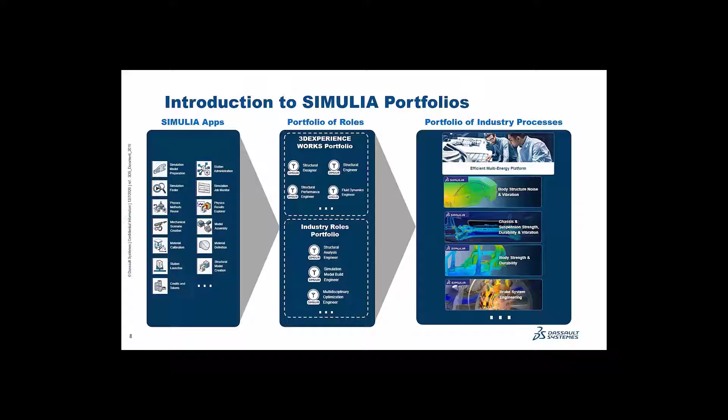For your reference, here's a summary of the simulation roles currently available in 21x. Most of these roles are new, although most of the apps within them are the same as they were in 2020x. The roles are arranged in either industry-specific roles, as seen on the right, or as cross-industry roles in a variety of domains, such as structures, fluids, electromagnetics, and so on, as seen on the left.

The intent is that for a given user, only one should be sufficient for them to do all they need to do on the platform, without the need for add-ons. I mentioned there were 7 Works roles, which are indicated above. These same 7 roles are also included in the industry portfolio as well.

Let's now take a look at the repackaging of what we know as the SPDM. One of the primary objectives we had during this repackaging project was to better articulate the values we are able to deliver to our customers. Often, when we would have engagements with customers, requests and solutions were described under the umbrella term SPDM, or Simulation Process and Data Management. While it is true that SPDM is a commonly used term in the industry, using it to describe our solutions undervalues what we can provide our customers through the platform.

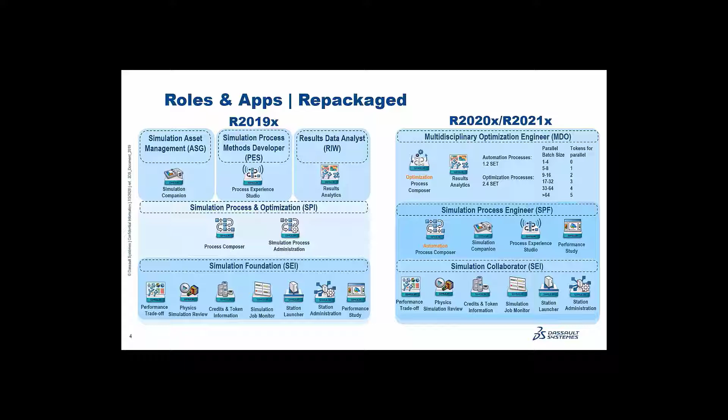This slide shows how the apps have evolved with the new packaging. Previously, we had two roles: Simulation Foundation, which provided infrastructure and apps focused on activities such as monitoring and sharing data, and the Simulation Process and Optimization role, which added capabilities to author automated or design exploration processes. Additional roles could then be added using these as prerequisites to expand the available capabilities for ad hoc processes, template creation, and data analytics. The new roles are intended to provide all of the apps needed to satisfy the categories I just described, instead of adding capabilities a la carte. For example, for users performing design exploration, they will not purchase separately the ability to post-process their results.

As part of this new packaging, there were a couple of key changes that were made. First, Process Composer is now split into two apps: Automation Process Composer, which provides the tools needed to build a process that can automate simulations and process data, and Optimization Process Composer that extends this capability to enable design exploration workflows, including methods such as DOE, Monte Carlo, or optimization. Another notable difference is that the Simulation Collaborator role is no longer an authoring role. Execution of automated or design exploration simulation processes will be performed through the SPF and MDO roles respectively.

We also simplified our business model for execution. Automation processes will now consume 1.2 tokens and optimization 2.4 tokens, with additional tokens shown in the table for parallel and batch jobs. Thank you, Christina.

Now let's run through some of the new software enhancements in R21x.

Not all the enhancements, like I mentioned before, will be presented, just some that have significant impact on certain roles and workflows. For each of these, only the roles which are significantly impacted are listed, even though other roles may include the app which has the improvement. These enhancements will be presented next in a few different arrangements of the same information for easier future reference. So many items may be repeated.

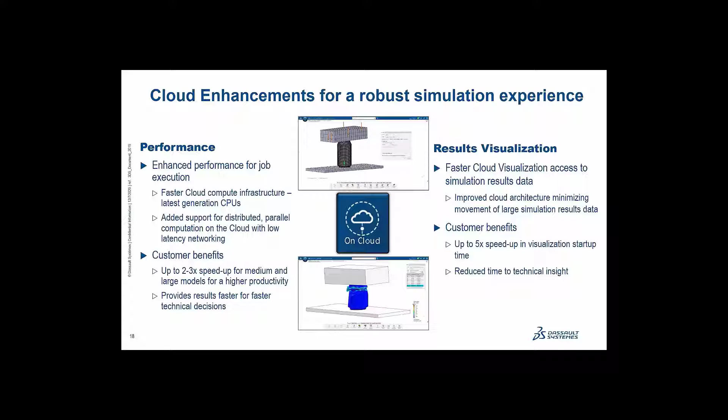Then, when visualizing large simulation results stored on the cloud, the visualization startup time, which is the time it takes to see an image after clicking on the results button, has been sped up by up to 5 times, again depending on the size of the results. This is due to an improved cloud architecture minimizing the movement of large simulation results data. In other words, any simulation cloud user out there will experience a dramatic improvement in the time it takes them to run jobs and look at results.

Okay, let's look at other app-specific enhancements. We're not going to cover every single function delivered, and we try to provide you with a good sample of what's being done. All the details can be found in the release notes and in information found on the platform, which I will be highlighting later in this presentation. You'll see that throughout the slides, we are showing you what the enhancements are, and on the right, we are again highlighting in blue which roles are seeing the biggest impact from a given set of enhancements. And at the top, whether the enhancements are delivered in GA or in a particular FD.

First, for structural model creation, the way we support Nastran data has been improved. This provides an increased incentive for 3DEXPERIENCE adoption, and we're providing users the ability to manage and use legacy and supplier data while maintaining the digital thread promised by the platform. A few examples. Additional data cards are supported. The importer now supports the inclusion of reference files, and we're giving it an option to structure the imported data.

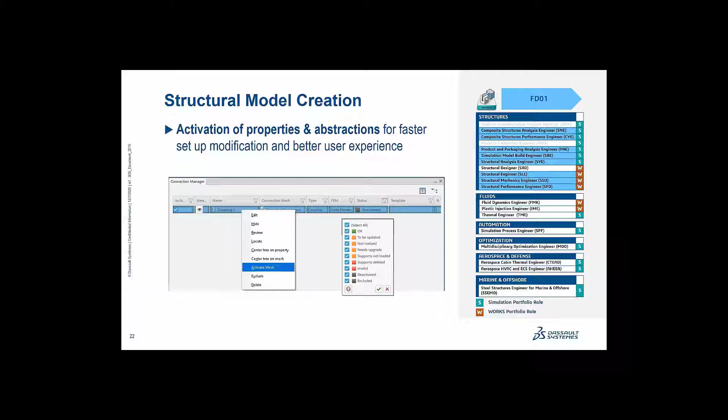Still in the same app, structural model creation, we're improving how virtual bolts are detected. So now, instead of only looking for holes when trying to detect where to create a virtual bolt, we can search for user-defined points and lines. This increased the robustness and speed at which users can define these very useful virtual bolts.

We keep improving the surface meshing in many different ways. The mesh quality and regularity are getting better and better, in part driven by the partnerships with strategic customers. And we're adding nice features like the new lined fastener T-joint construct, a new thickness mapping, and new section called shear panel. This last one is particularly important for A&D customers, aerospace and defense, and related to what is being done in legacy codes like Nastran. Overall, these enhancements provide users with the ability to increase how accurate the representation of thin geometries is, and therefore increase the accuracy of the simulation results.

In mechanical scenario, still in FD01, we're delivering the ability to use the FKM method to assess the fatigue of welds. This improves the credibility of the 3DEXPERIENCE structures apps as a fatigue solution and provides users the increased flexibility when assessing assembly's durability.

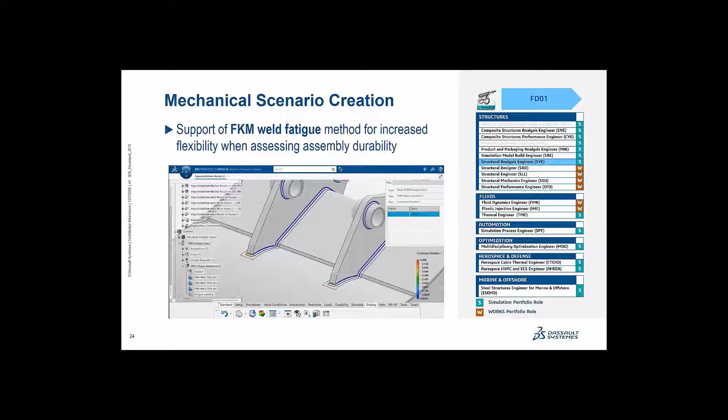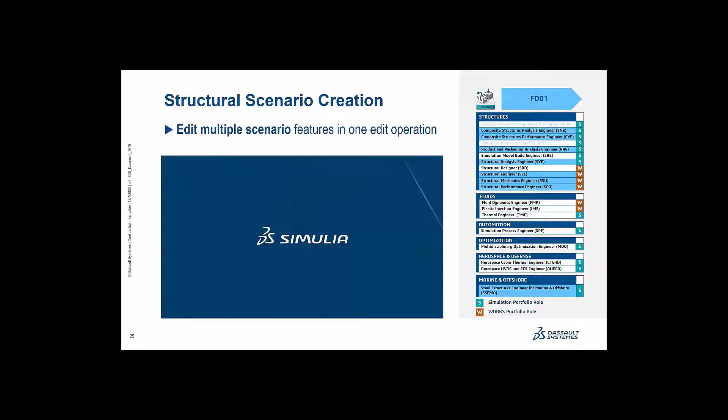Here, in structural scenario, multi-edit for scenario features allows users to make the same changes to multiple scenario features in one edit operation. Each video on this, well, you're not going to be able to see that. So to make it easier, each one of these slides has a video, but each video on these slides can be seen on a wiki page, which I'm going to give you at the end of this session.

For linear scenario, SOLIDWORKS simulation data support is included, SOLIDWORKS Connected, to streamline the engineering workflow with a unique capability. You'll be seeing more about that a little bit later. For post-processing, we provide users default global sensors automatically after solve for faster and more efficient trade-off studies.

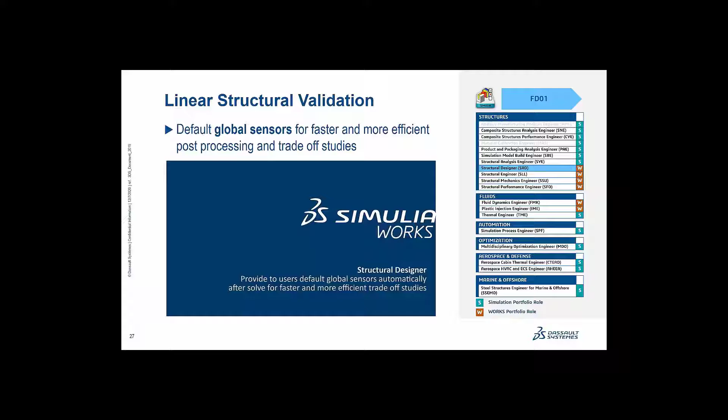For fluids, and this is our native Navier-Stokes-based solution, the main improvement is on solver performance. This is significant and important because it allows users to get to the results faster. We've improved the solver efficiency when working in parallel to be 10% faster for the segregated solver and 5% faster for the coupled solver. And the way the solver processes input and output data is faster by 30%.

For Physics Results Explorer, a couple of nice improvements. We're providing users with more ways to define cut planes, for example, by using a user-defined axis system. And we're adding the ability to define resultant sensors on a specific axis. This is actually fairly important. A sensor automatically extracts values for the quantities the user is specifically interested in.

This is particularly useful in the context of automation, if you want to reuse the value in a result as an output parameter to monitor, for example. When looking at efforts in a bolt, again, for example, it is often more useful to study what happens along the axis of symmetry of the bolt, rather than at its surface. This new capability allows users to do just that when using sensors.

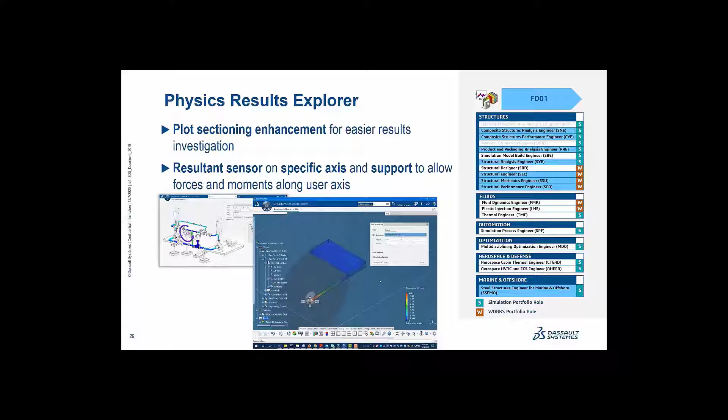So here, the new results comparison across analysis cases and simulation objects is the new capability. You can compare multiple field and XY plots from the same analysis case or different analysis cases in an intuitive, configurable comparison preview pane. Results comparison tasks become easier as you can display more than one view and more than one plot at a time.

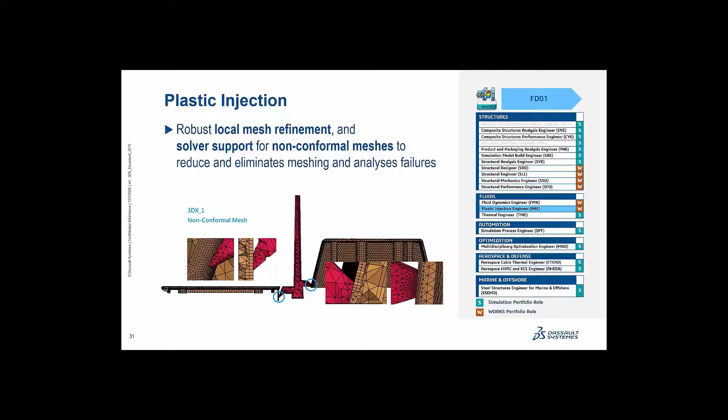The main enhancement for plastic injection is all about non-conformal meshes, which is when the nodes of two surfaces in contact are not aligned. This can sometimes become tricky for the solver to process. So in FD01, we've enhanced the robustness of the solver to deal with these types of configurations. And when it's not enough and the non-conformal meshes need to be fixed, we've added highlighting and fixing tools to help the user to do so.

Finally, for the Automation Process Composer and Optimization Process Composer apps you heard about earlier from Christina, we are improving the user experience with a redesigned interface for mapping parameters. This leads to a lot of time gained when defining optimization loops in mapping input to output parameters. And some might say increased user satisfaction when using our product.

We're also adding a so-called N2 parameter map, which is very helpful when it comes to understanding the data flow in an automation and optimization loop, by looking at the path and numbers of the parameters as they input and output the different adapters in the loop.

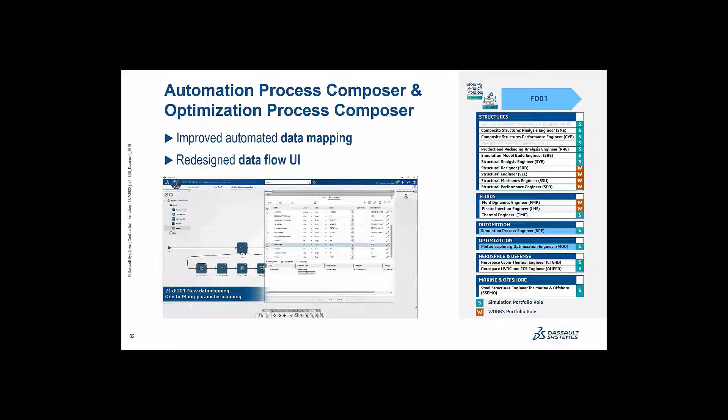So I'll not go through the details again, but the same information that I just showed on a per app basis is shown in this section on a per domain basis. I'll just flash the different sections by so you can see what I mean. So here you see the structures enhancements involving improved user experience and all the roles that are significantly impacted by that.

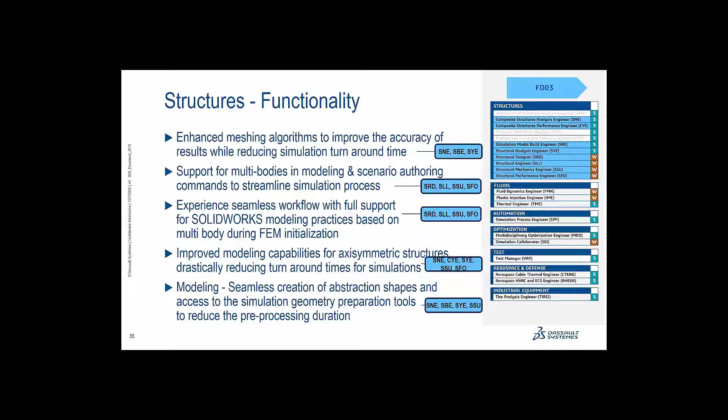The improved functionality for structures, same thing. Again, just reorganized, same information that I already covered. And the fluids enhancements as well. Just so if you want to refer to it in the future on a per app basis versus a per role basis, for your convenience. And here are the optimization and automation ones.

Now let's switch gears and give you an overview of the R21x FD01 portfolio for the Works portfolio. Again, a lot of the same information. I'll talk a little bit about general things associated with the Works portfolio, but then the rest of the enhancements will be summarized in the same fashion. The Works simulation portfolio is part of the 3DEXPERIENCE Works portfolio targeting the mainstream community with design, simulation, manufacturing, governance, and marketing and sales domains.

In 2020, the Works simulation portfolio is targeted at top simulation domains, including structures, computational fluid dynamics, plastic injection, and collaborative decision-making, so users get the right technical insights in all required domains at the right time. Works users are able to assess performance, reliability, and safety of their products for a faster and stronger manufacturing and go-to-market phase. With this new portfolio, tailored for the need of the engineering community, users experience unique engineering collaboration on a single and shared cloud environment.

They gain a full integration of design and simulation to increase innovation and eliminate silos. With this cloud portfolio, hardware barriers are removed to provide virtual testing benefits to all users through unique cloud computing. The value delivery plan for simulation has been structured along the following 5 drivers. 1, improve structural performance and quality.

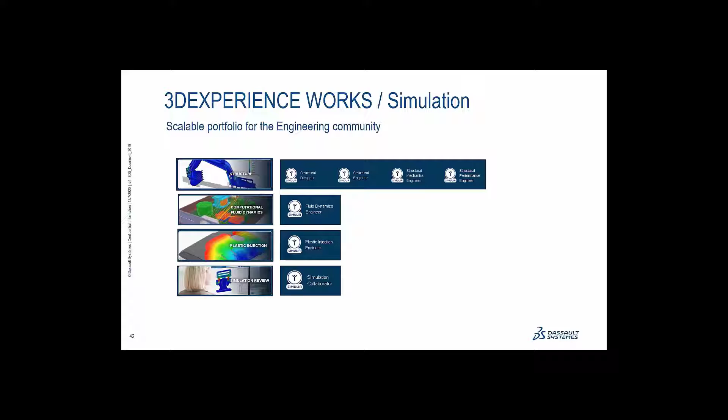To make informed decisions, users are empowered in performing trade-offs between competitive objectives and constraints, so the comparison is meaningful and leads to the right alternative selection. Within a 3D dashboard, users can easily visualize simulation data for interactive and collaborative reviews, changing the design process into a collaborative experience.

The 3DEXPERIENCE WORKS portfolio has been enhanced through these roles to meet users' day-to-day needs and bring a unique design simulation to all design engineers. We've already covered the enhancements to these roles in the earlier section, but I'm going to show them here again in a structured way for future reference. So you see here they're arranged more toward the SOLIDWORKS user. So I'm just going to blast through these because again we went through much of this material in the previous section.

Now, on to the illustrated examples. Asif and Ryan will show you how these improvements affect industry workflows.

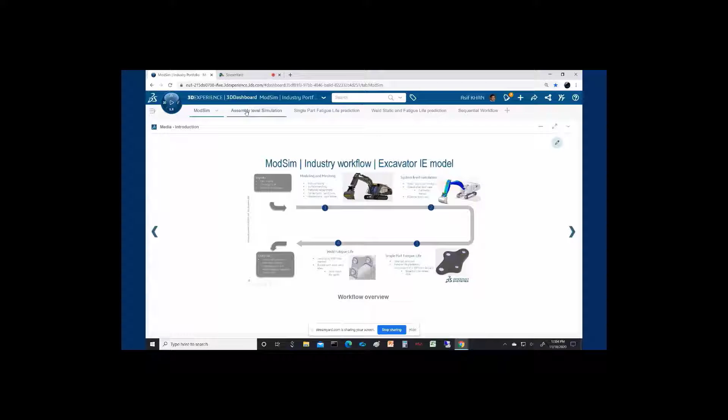So let's switch over to the assembly level simulation tab. And here you can see that in my dashboard, I have a spiral on the left representing the various pre-processing steps that will be carried out to build the model, basically do the meshing and the section assignment, and then get into more details with connections.

So first, let's have a look at the assembly that we will be working with. So I'm going to show you the model in this 3D Play web application. The analyst can quickly review, manipulate the model, and then we can look at the assembly structure. For example, here you can see the top level assemblies. And for this presentation, we're more interested in the front attachments for the boom and the arm.

So we can go in and we can review the various components and decide which ones to do the simulation on. But it's actually more interesting to get a high-level overview using some of the tools. For example, in the application, we have an explode option. So when I click on it, it explodes the model to show the first level, top level subassemblies, and I can go in and dig deeper inside to look at subsequent levels of subassemblies. And here you can see all of the subassemblies have been exploded for view and understanding.

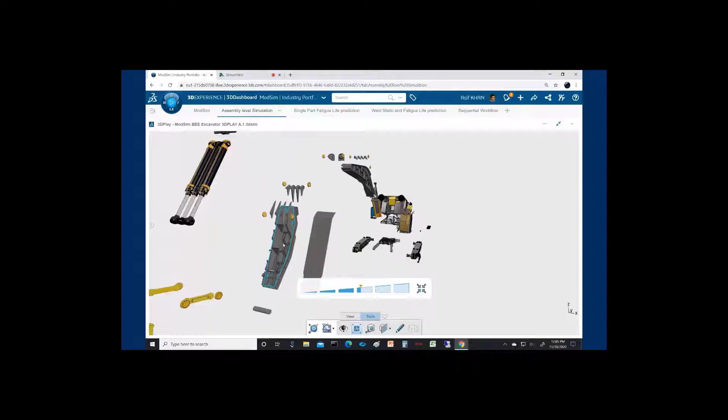As I mentioned, in this simulation, we're going to focus on the boom, and I can move these parts to understand the structure. So we have these thin solids, and also we have some of these reinforcements, which are actually made of solid elements. In addition, I can do some measurements if I wanted to, and also, for example, collapse the assembly and maybe enable a view cut to inspect the interior of the model at different locations.

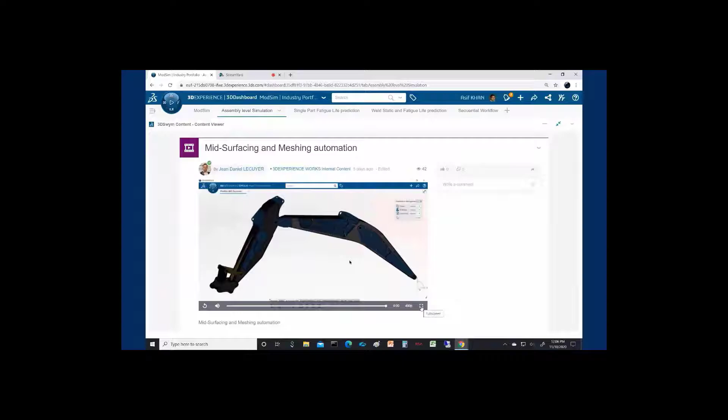So once I'm satisfied with the version of the CAD model, I can go ahead and begin with my finite element simulation definition. So the first step will be to define the mid-surfacing definition and the mesh. And in this case, we're going to use the automatic tools available on the platform as they have been developed in the last few releases, providing a lot of efficiency to the user.

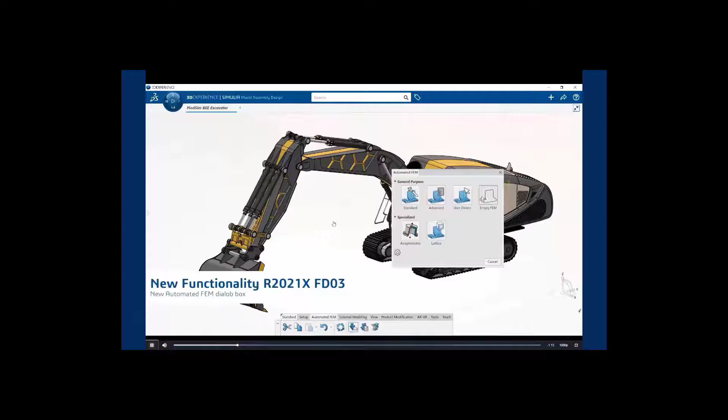So we're going to look at the assembly, and right now we're in the model and assembly design workbench. So we can switch over to the automated FEM section and then begin with the process for defining the mid-surfacing and the mesh. So with this new capability, we have this advanced option for automatically generating the mid-surface mesh.

And here we have a bunch of procedures. We can specify some parameters, choose the parts, the mesh size, and the user can also define additional procedures to be used based on various conditions. So some of the parts will be mid-surfaced and meshed, while the remaining few will be meshed with solid elements. And in addition, we can automatically create shell sections and material sections. So here we can see that 30 parts will be meshed and mid-surfaced. And when we hit run, you can see a report where we can now look at the results.

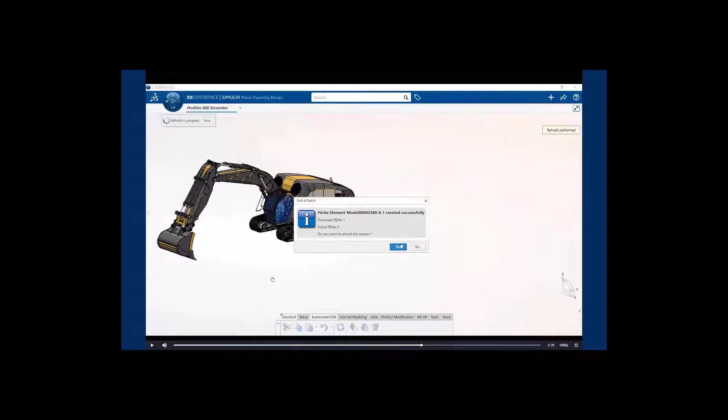Now, obviously, if there was a problem with the mid-surfacing or the mesh, the user can go in and modify some of those parameters using this interface. So we can do a quick review, and using the visualization management tools, we can have a closer inspection of the mesh. So the blue mesh is the shell mesh that has been generated, and then the others are the tet mesh shown in the other colors. So the mesh looks good, and we don't need to revise anything. We were successful in the meshing operation, so now we can go back and proceed with the next modeling operation.

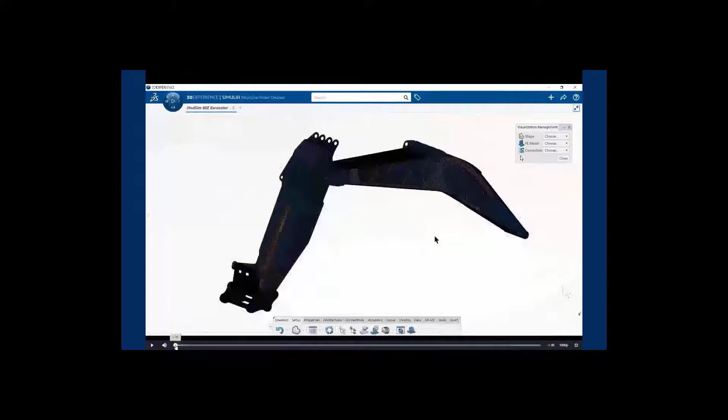So to model the welds in the assembly, we're going to use the line fastener and detection tool. So let's look at that. So as before, we're looking at the meshed boom assembly, and we can go ahead and start with defining the line fasteners to represent the welds. Now, again, we can look at the parts from the geometry or the mesh. And now we're in the structural model creation app, where we're going to use the line fastener tool to use the weld curves that were defined in the CAD system for the weld creation.

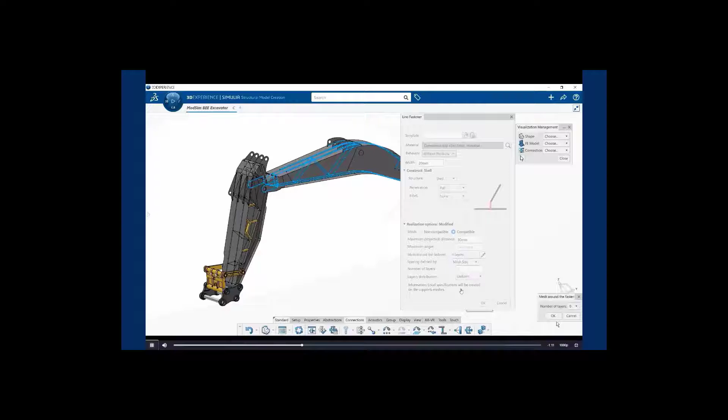So we can select the weld lines shown in blue that we want to use. And you can see that we have 52 entities selected. Then we can use the search tolerance to search for adjacent parts that will be connected by these welds. And as you can see, we have a lot of other parameters that can be specified for the weld definition. In many cases, we can use the defaults, or we can go ahead and hit the search button. So once the search is completed, you can see different welds that have been created.

We can highlight, and the associated faces that are connected are also highlighted to facilitate in the review. Next, we can zoom in, and we can see in light gray the new connection meshes that have been generated for the welds with the compatible meshes. And we can visually inspect the different regions to make sure it's correct and complete.

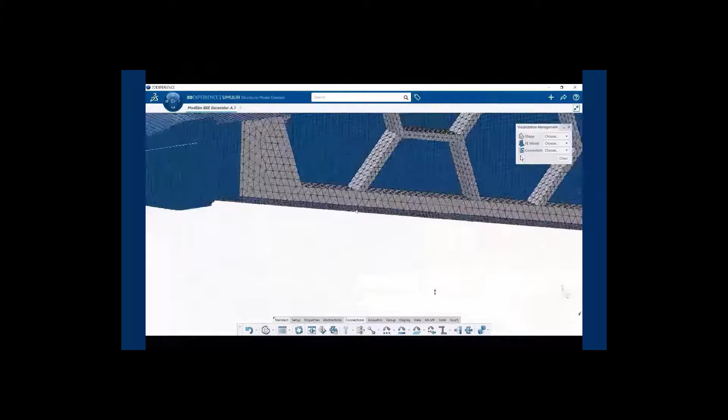And obviously, we can hide certain parts to see the interior, as we can see these stiffening plates. In addition, it's also a good idea to check for interferences in regions that are not connected. So you can see that most of the weld line regions are shown with blue elements showing connectivity, but these red highlighted elements represent intersections between solids and shells, or solid to solid. And we can obviously define tie constraints manually to connect the remainder of the parts.

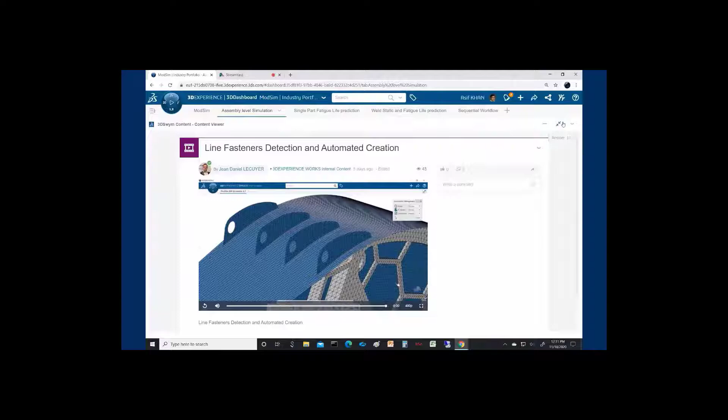So once the automatic weld creation has been created, as I mentioned, we need to define additional connector elements for the actuators, maybe create some couplings and other types of connections. And that, again, can also be facilitated through the use of connection templates and automatic instantiation. And a lot of these can be based on best practices that have been defined by methods developers in your organization. In the interest of time, I'm not going to show the remaining steps of this modeling sequence,

but I'll also mention that once the connections have been completed, we provide a comprehensive connections review capability with some recent enhancements, for example, to look at all of the connections that are associated with a particular part, or all of the parts that are connected to a particular type of tie constraint. So this helps in quickly reviewing the connections in a tabular format with 3D highlighting.

And then finally, some of you may know we have had material calibration capability on the platform for looking at realistic material calibration and parameter definition. We've made several enhancements in this release. For example, we now have the ability to look at rubber test data, which may be frequency-based, and we can do a curve fit on that with the material calibration app to come up with appropriate parameters for realistic simulation.

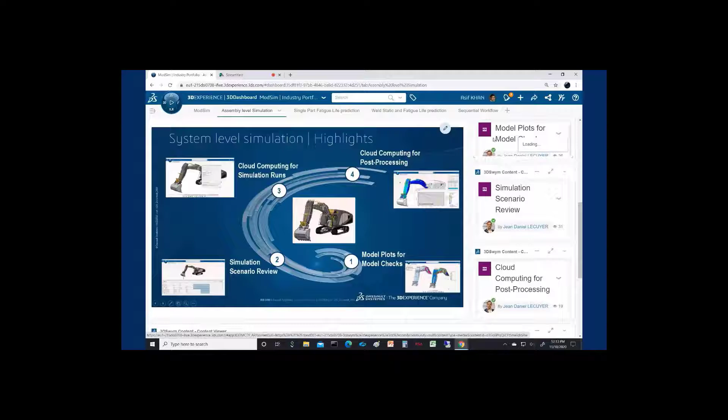So next, we're going to move to system level simulation definition. So again, in the spiral, you can see the various steps that are needed to define the simulation. So let's first have a look at the model plot definition. So here we're going to review the model that may have been created by a different user or maybe in an earlier session. So we are in the model plots workbench, and this allows you to quickly review the definitions in the model without having to run the simulation.

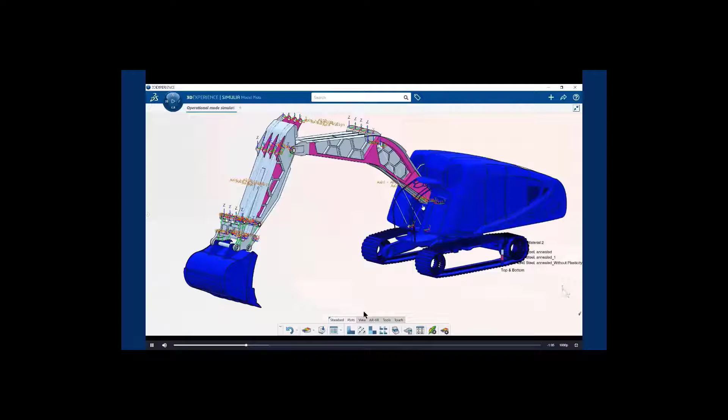So right now we're looking at the connections, and then we can color code by material, for example, to look at the material assignment to make sure it's complete and correct. And then we can also look at other parameters such as the thickness of each of the shell sections.

One interesting recent enhancement is the ability to look at multiple plots at the same time. So we can activate multiple plots. They can be in the spread mode. We can specify the spread distance. And again, we can simultaneously review the shell thickness and the material assignment for verification. So you can see the legend showing the details for the materials and the shell thickness.

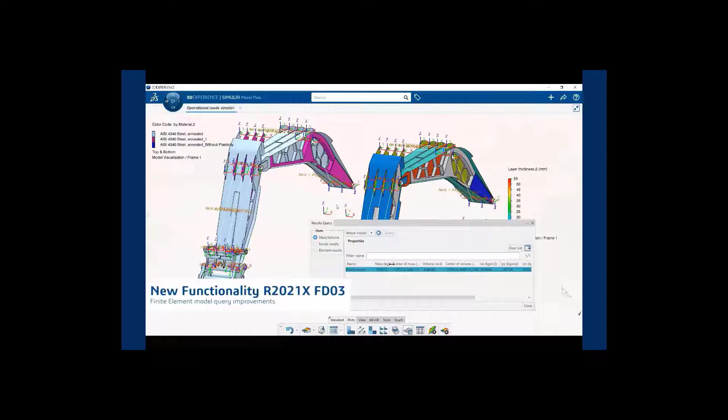Another recent enhancement is the ability to query the mass of the entire structure. So you can see in the table, we have not only the mass, but the center of volume and moments of inertia. And you can also pick or filter based on specific parts and look at the mass contribution from specific components. And obviously, we have some convenience tools where you can export this information, and it is also persisted with the simulation. So we're good with the modeling definition.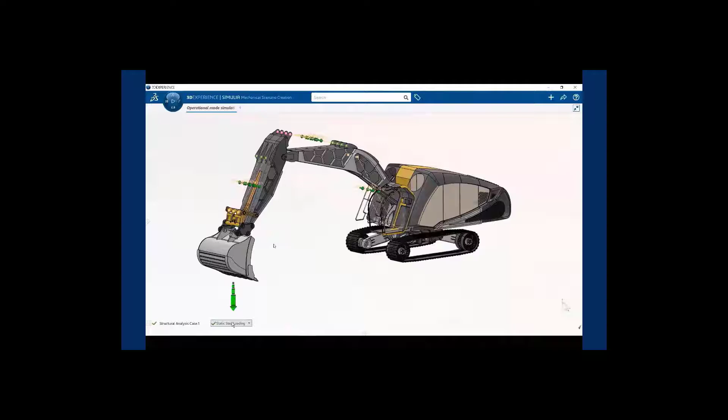So we can go ahead and do the scenario definition, which is essentially loads and boundary conditions. So we have already created the steps and the loads and boundary conditions, but I'm showing the feature manager, which will be used to review this two-step simulation. So we're assuming a service load where this excavator is doing some kind of digging with a hard soil, and we're going to review the connector forces.

And using this new functionality, we can selectively hide or show specific scenario features such as loads and restraints to get a clear picture of what's active and how it's being defined for verification. So you can see the two steps and the service loads that are active in the loading step.

So you can see the connector forces. Another nice enhancement that we have delivered in the recent release is to multi-edit scenario features such as connector forces or bolt forces. So you can select multiple rows from the table and be able to specify a new value. And this handles different values which can be updated with the new value.

So once we are satisfied with the simulation definition, we can go ahead and execute it. So in the last couple of releases, we've spent a lot of effort to enable high performance compute infrastructure on the cloud. So you can run your simulations very efficiently using the appropriate resources on the cloud for native and imported simulations. And we use that to run the simulation.

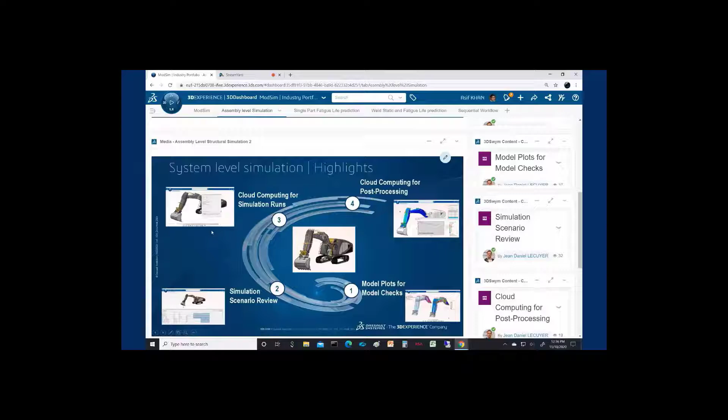In the latest release, we've extended the cloud compute capabilities to also include post-processing. So the big advantage here is that we can do post-processing without having to download the bulk data to your local machine, so saving bandwidth and giving high performance.

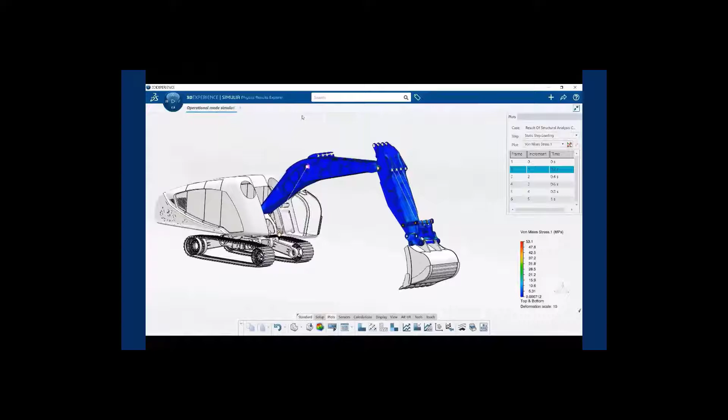A recent enhancement that I'd like to highlight is the automatic creation of sensors during the solve. So this is available both for designer and expert simulation. And you can see some key quantities such as maximum displacement, principal stress, von Mises stress, and mass have automatically been created and available for review. So this helps, for example, if you're doing a design iteration and you want to look at the change in the value, or maybe a DOE, or in an optimization study.

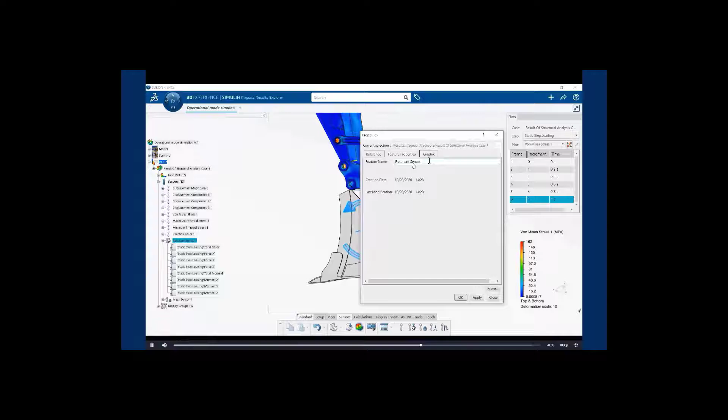We've also enhanced the ability to create resultant sensors. You have automatically created sensors to look at force and moment. But in addition, you can also manually create resultant force and moment on a view cut. So here we have activated a view cut, and we can drag it, and we can enable the display of the force and moment on that section.

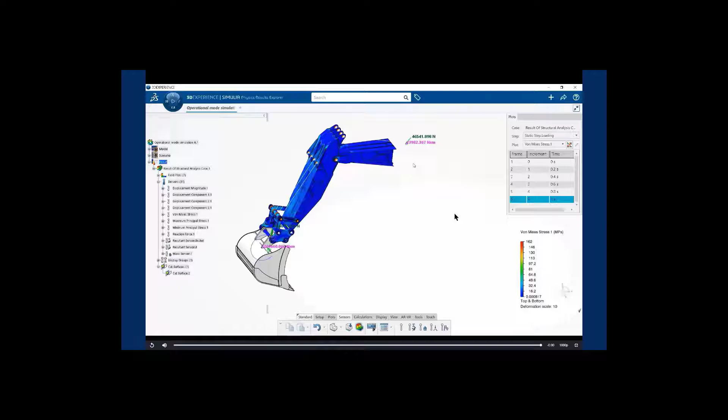The new enhancement is you can now also define force and moment output on a cut surface. So here we can choose the cut surface, that's the current active view cut, and we can look at the force and moment resultant on the view cut. So all of this information is persisted. So if you were to rerun the simulation, these values would be updated based on the new results, and they would be available for review very readily. And obviously, you can define multiple cut sections as well.

So in addition, we can run additional analysis cases or simulation types. For example, we can do an ultimate load simulation. For example, here I have a tip limit simulation where we're looking at an extreme case where the bucket may be constrained and the back of the assembly is uplifting, and we can see the more extreme results in this case as well. So you can have multiple analysis cases defined in your simulation.

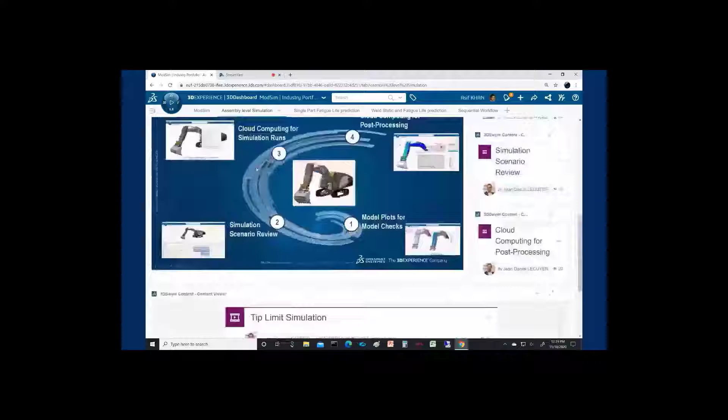Okay, so that's all for the structural simulations. Next, I'm going to switch over to the next tab of my dashboard, and this is for durability assessment of a single part. And once again, I am showing the different steps in the spiral on the slide on the left, and we can go ahead and look at some of these details.

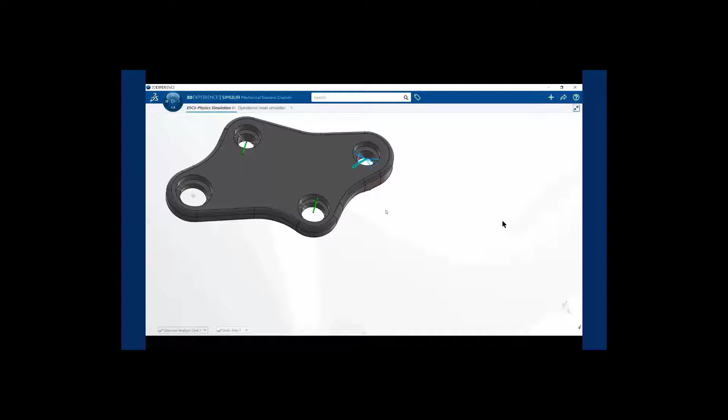So the first step for the user is to review the results of the FEA simulation. So here we have this connecting bracket with particularly high von Mises stress, and we want to do a study of the durability performance. So you can see the loads that were defined in the finite element analysis. We have three forces representing the service loads, and we're going to use this simulation for defining the durability analysis. So you can see a couple of hotspots that are present in the model.

Okay, so now let's look at the steps to define the durability simulation in step number 2. And here we can look at the part in more detail. So we have in the same simulation a new analysis case with the forces, and we can go ahead and create a new durability case. So we can go to the durability section and define the fatigue loading parameters. Here, as I mentioned, this is the nonlinear simulation, so we can select the steps and the frames to use.

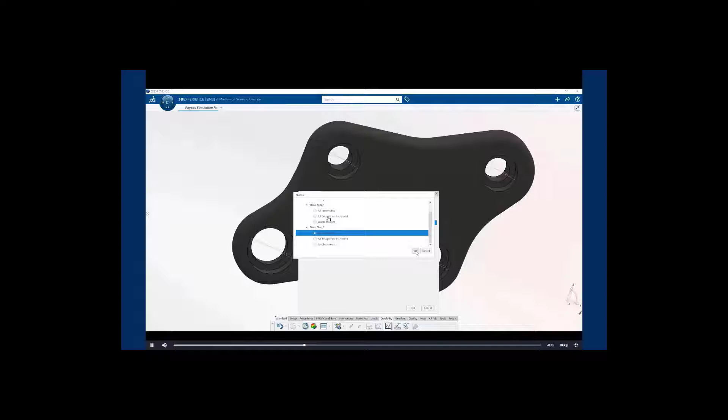We can add frames, so we're going to select all frames from the 2 steps, and then we can define the number of cycles without any failure. And then we can also modify or specify the surface finishing, which is critical as fatigue cracks typically begin from the surface. So using the same interface as previous, we can go ahead and run the durability simulation. So you can see that the exact same UI approach is used for the structural and fatigue simulation.

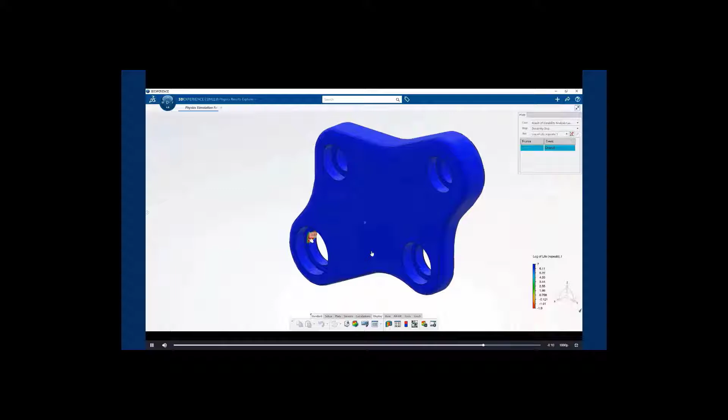So the simulation has completed, and we can go ahead and look at the results. So when we zoom into this region, we can see 2 hotspots with unsafe design with log of life less than 0. So obviously, we have to address this situation with a design change. Typical design change is maybe modifying the geometry, maybe removing a fillet or modifying a chamfer. So that's using standard CAD tools. So I'm going to skip that in the interest of time.

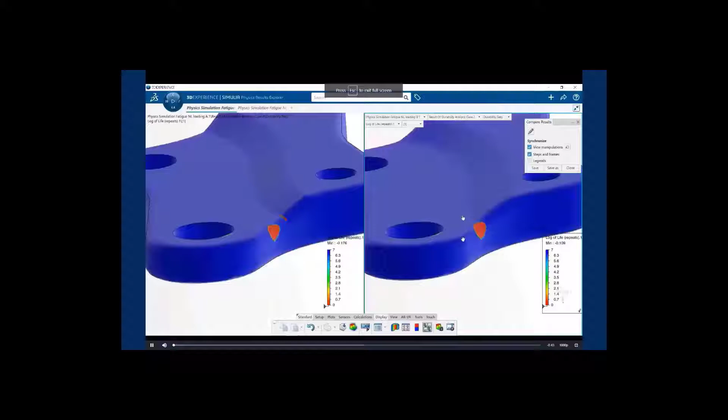So we're going to jump right ahead to step number 4, which is the results comparison with the modified design that has been run with the platform. So let's look at the results comparison. So on the right, you can see the modified design, and one of the hotspots has been eliminated with the modification. And the user can obviously go ahead and make further modifications.

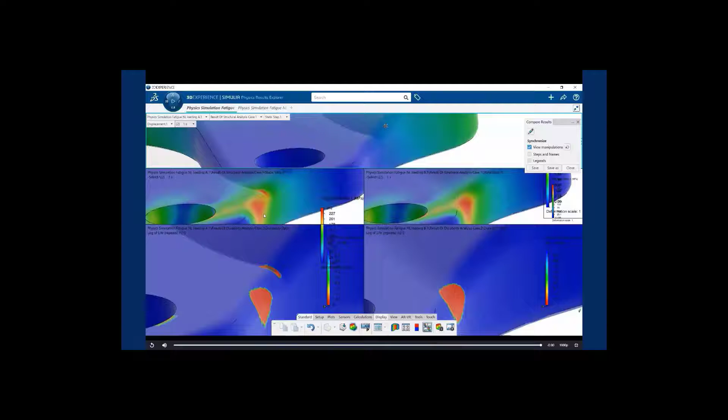Now, this comparison tool is also new. It's pretty convenient and easy to use. It's available for standard and durability simulations, so structural and fatigue. And you can drag and drop results or plots from different frames, and then you can have a comparison with multiple windows with a lot of synchronization for view manipulation, as shown here, but also for steps and frames and legend. In addition, you can save your comparisons, and also you can compare XY plots with field plots and run animations with synchronization. So that concludes this section where we were looking at durability of a single part.

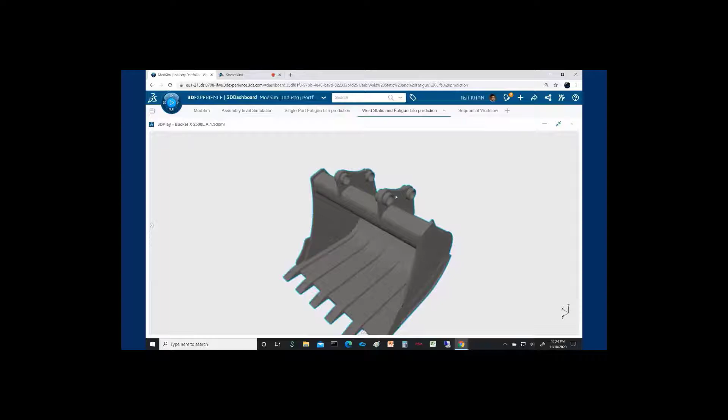My final set of slides is on weld strength and durability analysis with the FKM method. And again, here we can look at the bucket subassembly that we're going to be analyzing. So we're going to look at the weld strength between the bucket and this bracket, and also between these cylindrical attachments with the mount. So we can go ahead and look at the steps. So typically, when you are dealing with complex CAD simulations, you don't want to disturb the CAD model that has been given to you, because you have a PLM system and the CAD data is master.

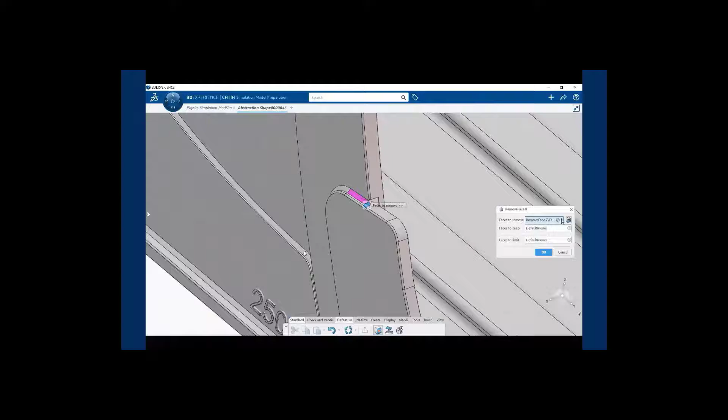So we have this new capability where you can create an abstraction shape with geometry simplification that will contain your simplified geometry for finite element simulation. So we can open the bucket part in a new window, and then we can remove or modify some of these fillets or other fine features that are not needed for the fatigue simulation. So here we're using the tools to simplify some of the detailed geometry. So as I mentioned, we have strong links between the abstracted geometry for simulation and the parent. So if the design was updated, those changes would automatically be reflected in this abstracted geometry.

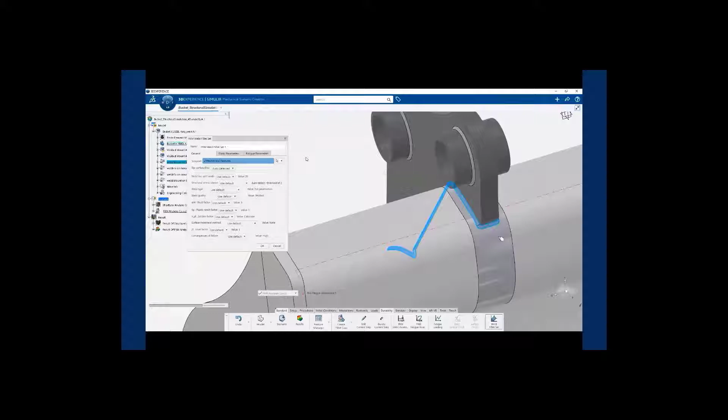So once we're done with the changes, we can go ahead and define our weld simulation. So here we're using the same subassembly, and we are in the FKM analysis case section, and we can go ahead and define the various parameters for FKM-based fatigue assessment for the welds. We can also specify some additional parameters for the welds. In many cases, you can use the defaults, or you can specify some specific handling based on your use case. So we selected the welds that we want to analyze, and we can review the fatigue parameters. So once everything looks good, we can go ahead and define the loading.

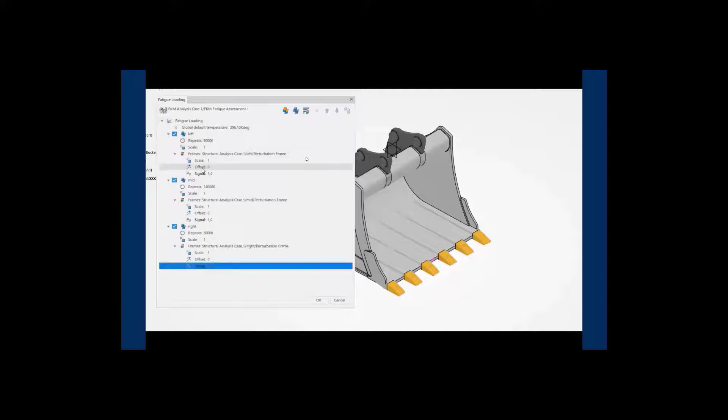So in this case, we're using linear perturbation steps. We have 3 service loads shown here, and we can combine them and define the number of cycles with superposition, and also a scale factor to combine the signals. So we're going to do that for the 3 loading cases. And then once that's completed, we can go ahead and run the FKM simulation. I will mention that we're also working on other methods. For example, some of you may be interested or familiar with Verity. That's something that will be made available in coming releases. So once the fatigue simulation with FKM has been completed, we can go ahead and look at the results.

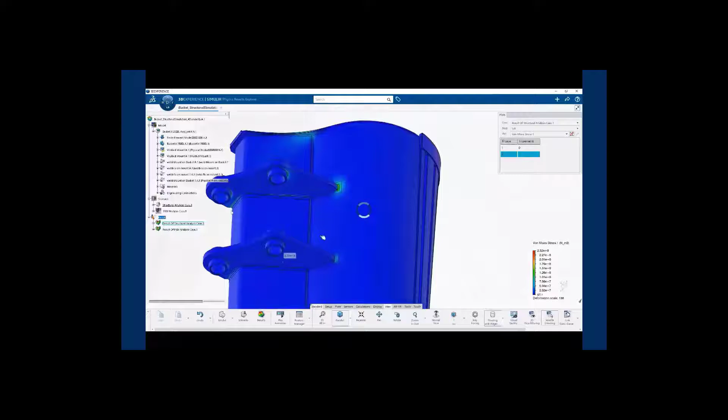So we have first the static simulation results. We're looking at Mises stress, and you can see the higher stresses in the welds that we are evaluating. We can switch between the steps representing the different load cases.

And then we can look at the utilization for the individual weld bodies that have been analyzed with FKM. And in this case, you can see that for all of the load cases, the utilization factor is less than 1, meaning that the welds are safe for the number of cycles for this simulation usage.

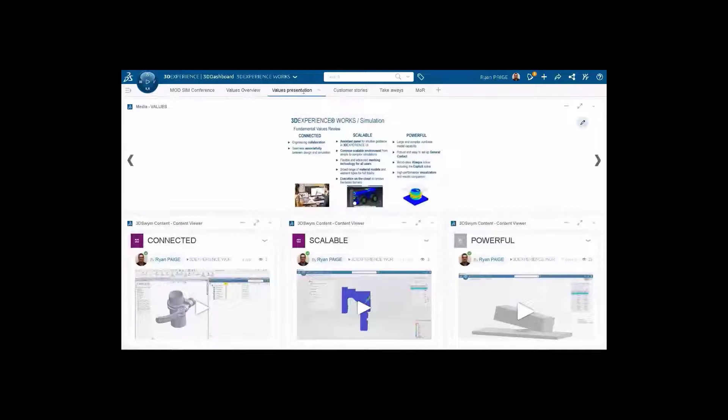These workflows are being developed to continue to break down the barriers between design and simulation, and we've focused on what we call these three pillars here: connected, scalable, and powerful. So if we dig into these a little more, for connected, we're trying to connect people during the product development process to make them more productive.

And the 3DEXPERIENCE platform lets the users collaborate during the design process to help them be more efficient working together and improve the development process. It's a cloud solution where data is secure and accessible to any of the people working on the project. And basically what that's doing is providing a single source of truth for the data. So we're trying to bring the world of design and simulation closer together for a true simulation-driven design experience.

And scalable means we're addressing the needs for virtual testing from the designer to an advanced engineer analyst in a common environment. And what that also enables is that a user can expand their capabilities based on their needs. And since this solution is cloud, it's another way that we can help try to break down hardware barriers. So any company, whatever their size or whatever the IT infrastructure, can benefit from cloud computing.

And powerful, so we're delivering simulation solutions powered by the Abaqus technology. And powerful also includes making life easier by providing unique capabilities such as general contact. So we'll highlight a few of these here. I have some videos to talk about this. So first with connected, let me go ahead and start this. We'll look at a couple of design workflows.

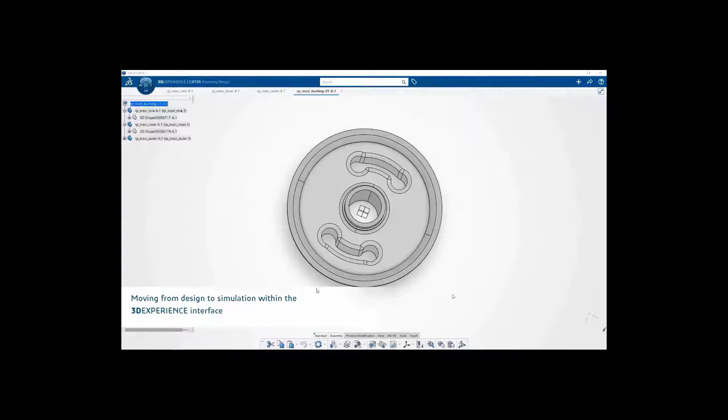And the first one basically is starting with your design in 3DEXPERIENCE with the CATIA design app. So this isn't new, but it's a little bit of a reminder here. So once you have your data on platform, how easy it is to move from one app to the next. So the data can be consumed by any app, including simulation. So here is just showing a setup of a simple bushing.

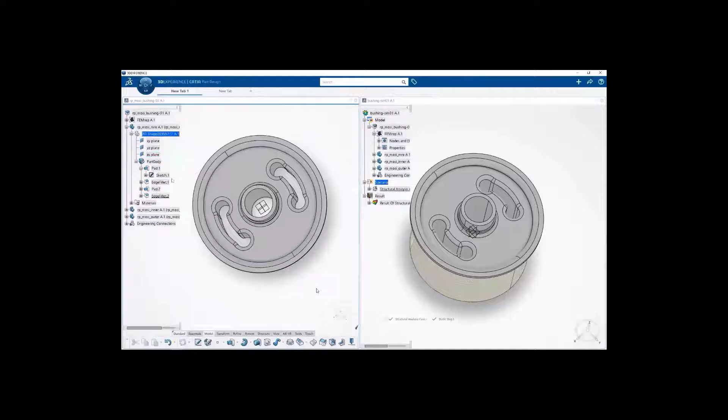And we're using the assistant panel here to run the simulation and then take a look at the results. So we're just looking at some strain and a load versus deflection curve. And again, since this data is on platform, each app is using the same data. So on the left, I have the design CATIA app. On the right is the simulation app.

So you can see changing the design instantaneously affects the simulation. So we just increase the size of the voids here, and then we just go ahead and refresh and rerun the simulation. And then we can look at the new results here. And as Asif showed earlier, we do have results comparison tools to quickly pull these results and do a side-by-side comparison in this case. And we can also pull in the force versus deflection curves here and take a look at those as well.

So the next workflow is newer, the way we're doing it here with the design to simulation from SOLIDWORKS desktop. So what we have here is SOLIDWORKS connected. And when you have that, the first thing I'm showing here is that now in your SOLIDWORKS desktop, you can apply materials to your parts from the 3DEXPERIENCE platform when you have the SOLIDWORKS connected setup. And so here we just apply the material.

And then the next thing, you can also connect the CAD data to the 3DEXPERIENCE platform and make the 3DEXPERIENCE platform basically the master data. And we do this through this PLM services panel, which is like a portal from the SOLIDWORKS desktop to the 3DEXPERIENCE platform.

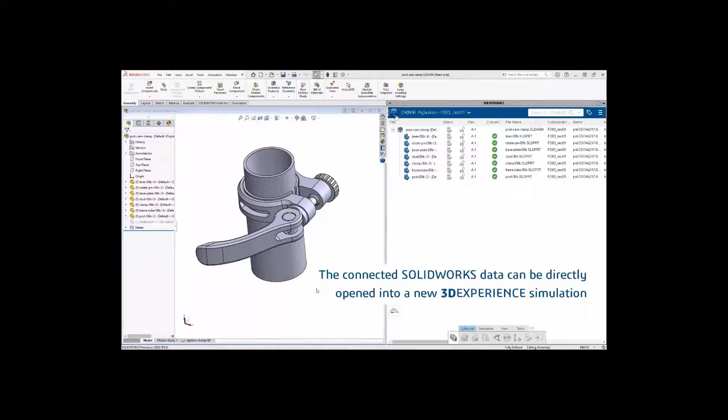So here we're just going to convert and save the CAD data to the cloud, and this will be our single source of truth. And once the data is on the cloud, on the platform, again, it can be accessed by any app. And in this case, we can directly open up a new simulation from SOLIDWORKS desktop, but it's a simulation on the 3DEXPERIENCE platform.

So we just go to the compass and select your simulation tool that you'd like to use. And here we can go ahead and start a new simulation. But another thing that we've included, though, is that if you already have SOLIDWORKS simulation study data set up, at least for static situations, we can transfer that data as well.

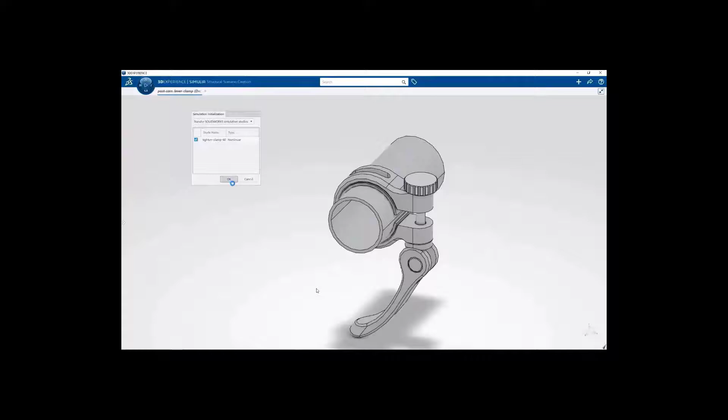So back to our panel here, the SOLIDWORKS Connected, you can see we can upload the simulation data into the 3DEXPERIENCE simulation automatically. And here we're just taking a look at what was transferred and what hasn't been. And then you can continue to work on your simulation and go ahead and run it.

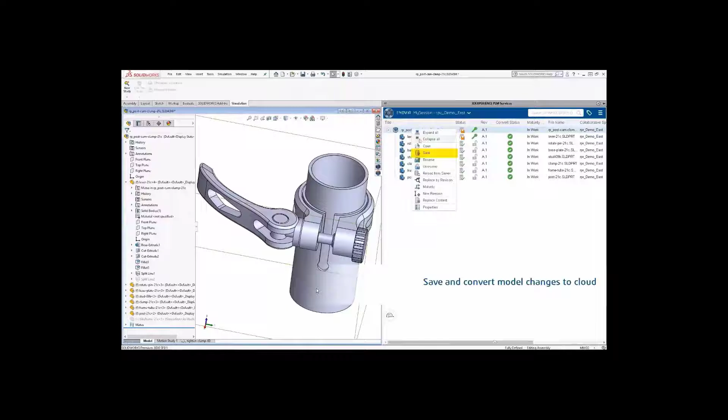And then using SOLIDWORKS, so once that data, the master data, is on the 3DEXPERIENCE platform, again, all we need to do to update it is we reserve the data, and then we can update it in SOLIDWORKS. And we're controlling the data through SOLIDWORKS. As soon as we add the update, again, we're going to save and convert and automatically release the data. And then we'll jump back on to the 3DEXPERIENCE platform for the simulation that was already set up.

And once we get into the simulation, we just do a global refresh, and that will automatically update our simulation where we can, again, run it. So that's a quick look at a few features from Connected for the design to simulation.

In the next segment here, I'd like to talk about the scalability. So I'm just going to talk about a few things quickly, and we can look at this through a video. And the first thing that we'll look at here is the assistant panel that we have available for users. So, anyone can use it. If you're new to the platform, this may be a nice way to get used to it. If you're not using it frequently, the assistant panel is a nice way to set up your analyses.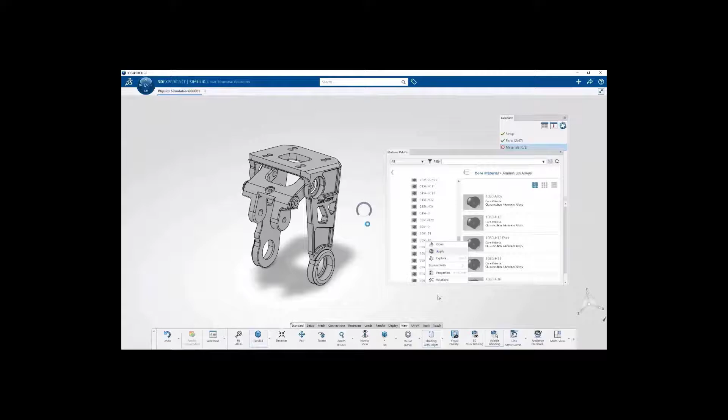So you can see here, we're just going to kind of work from top to bottom, and we have visual feedback about the simulation setup. So again, you can do pretty much everything through the panel. We've included most of the tools in the assistant panel, but if there's not a tool that's included in the assistant panel, that would be in the action bar at the bottom.

So here we've selected a couple parts from the assembly, applying materials, setting up some connections, and then we're applying the restraints, and then we're going to apply a couple different loads, and then we can just go ahead and simulate it. And basically this entire setup was driven from the assistant panel. And then here's the final results to look at.

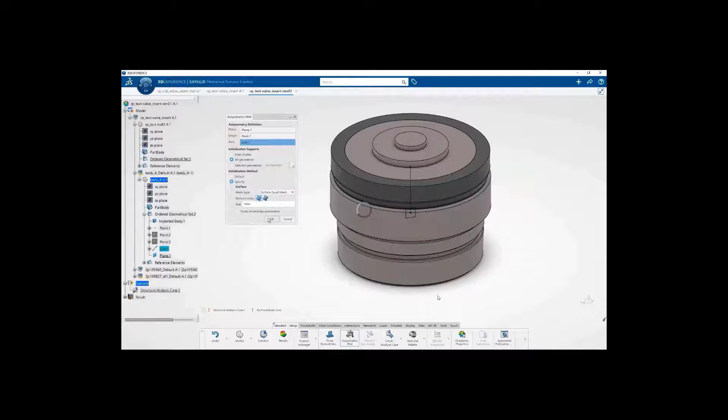The next section of scalability here, just a reminder that you can also scale by simplifying some simulations. So in this case, we have an axisymmetric idealization. It's a 3D part, but the loading and the geometry in this case can be axisymmetric. So all we need is a cutting plane and an origin in our line of axisymmetry here, and then we can go ahead and set up this problem as axisymmetric.

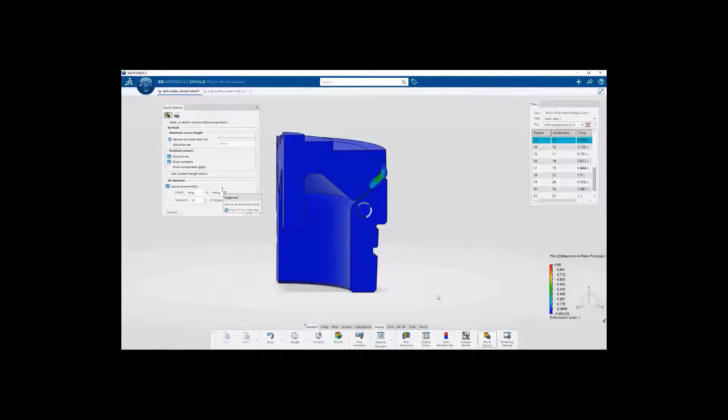And the advantage in this type of situation is you can save essentially a magnitude of runtime, probably, or more, running this thing as axisymmetric. So you can really refine the mesh and take a look. So what we have here is just a rubber seal, and we're compressing the seal between the two components. And then when you want to discuss the results with other stakeholders, it's easy to take a look at this like it's 3D as well.

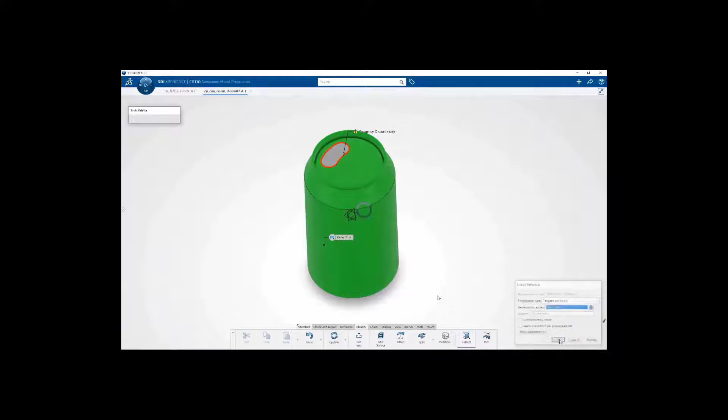So the next feature to talk about here for scalability, again, there's many features, but I'm just going to highlight a few things. So there's lots of different meshing tools available for all levels of users. We also have some model prep tools available to help with your meshing. In this case, we have a solid can, and we're just going to extract the surface so that we can do a shell mesh on this can, and we're just going to use some quad shell elements.

And one of the nice features again here is once we have this mesh set up, since we've extracted the surface from the solid, it automatically is able to pick up the variation of thickness through the solid. And you can see that in this contour plot here. So the center of the can is the thinnest and the ends are getting thicker.

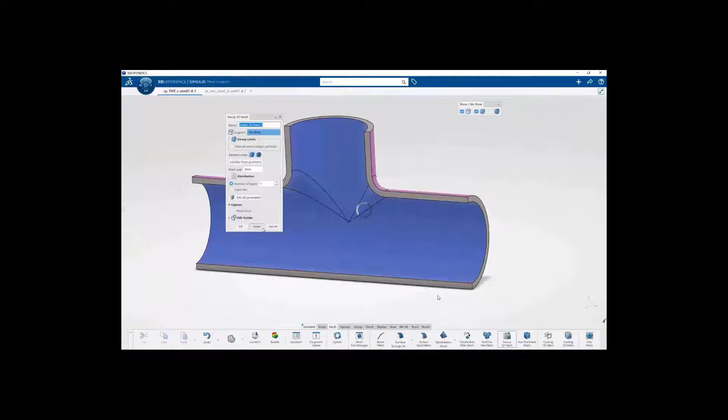There are also hexahedral meshing tools available. A couple different methods to do this, like the sweep mesh. So here's a tube hydroforming simulation that we're setting up. We do the sweep mesh for a couple of the parts, and then for more complicated geometry, there is a partition hex mesher that you can partition geometry into sections that can be hex meshed

pretty easily. And finally, under scalability, again, we have a cloud execution option available. So when your models are getting large and you don't want to run them locally and take up your machine, we have this option where you can run on cloud. Currently, we have 18, 36, or 144 cores available to run, depending on the size of your model.

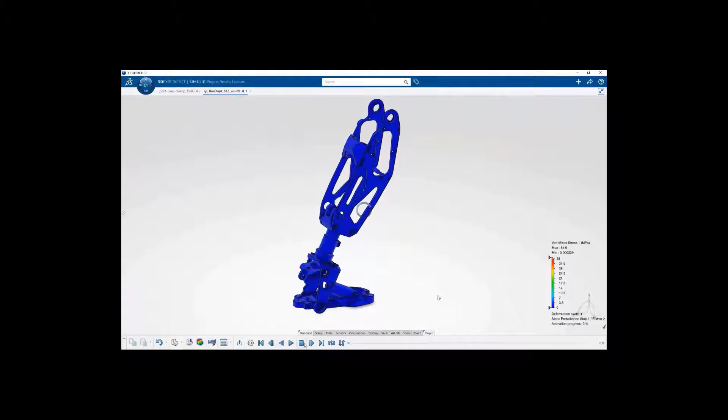And then finally, for Powerful, a couple of highlights. I would just like to talk about first. I'm going to play this video again, and we've already seen the situation with this cam lever clamp and this bicycle post, but with general contact, setting up contact for this is pretty straightforward. So there's lots of components interacting with each other, but with general contact, it's powerful.

We're making life easier for you. It's just a matter of a few clicks. You can set up the contact property and then just assign it. And with a couple clicks, you're all set. You can continue to set sub assignments for different friction interactions for other components if you'd like. And that's just a few more clicks again.

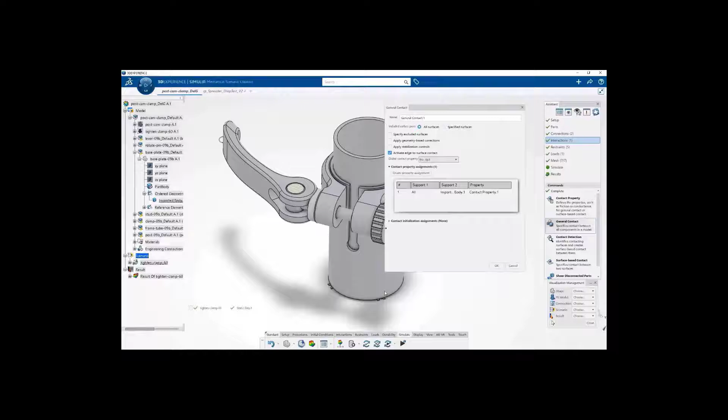So here again, we've seen these results already. We're looking at the stress, but we can also take a look at the contact pressure, and we can peel away some of these parts and see how these components are interacting with each other throughout the loading.

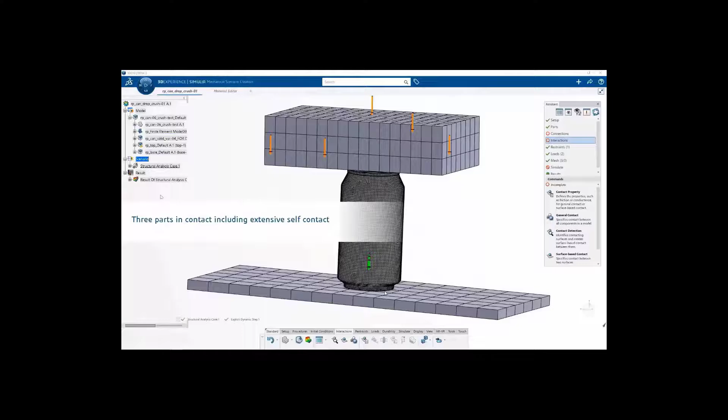And then in the next example, we'll talk about general contact as well, but we're going to also talk about this in the context of the explicit solver, which is another great additional capability that you'll have. So in this situation, the contact between the components is pretty easy, but the self-contact is extensive. We're just going to crush the empty aluminum can here with this block, dropping it on it.

So you can see, again, it's just a pretty straightforward setup. A few clicks to set up the contact, and we've captured everything, including all the self-contact in this situation. With the explicit solver, this is an impact or a drop test. We can easily run this and capture all the deformation, the plasticity, and here we're taking a look at all the contact.

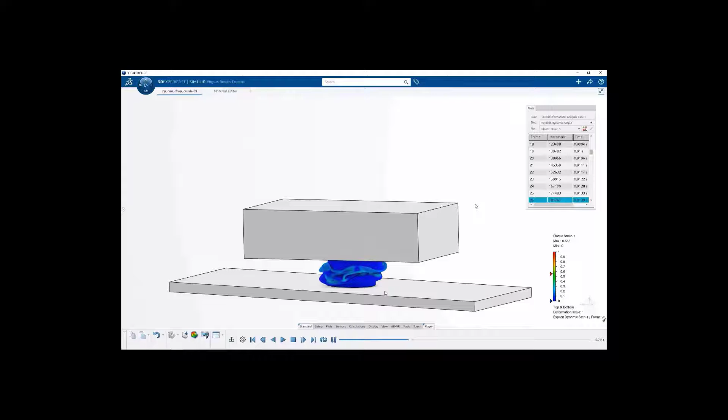And we'll go ahead and remove the block to take a little better look at this. And you can see the extensive self-contact happening in the deformation of the can. And then we'll go ahead and cut the can in half and take a look again at all the contact that we're seeing.

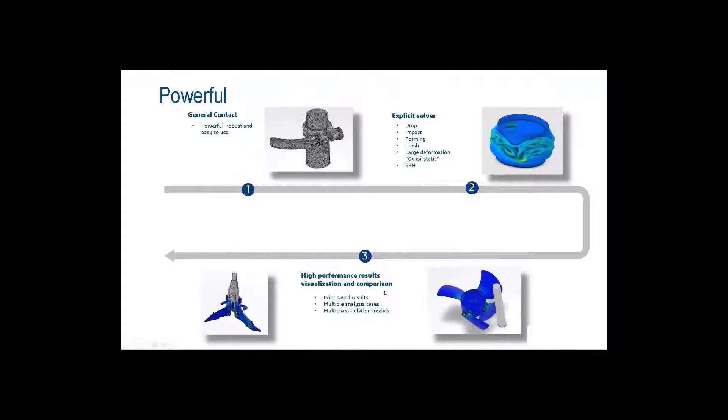And this is just one of the examples for the explicit solver. I've included a couple more examples as well, some simple models. And so the next one is an impact of a drone propeller, a high-speed, short duration event of this propeller impacting this rigid body here, and we're using material damage and element failure, and we're seeing that.

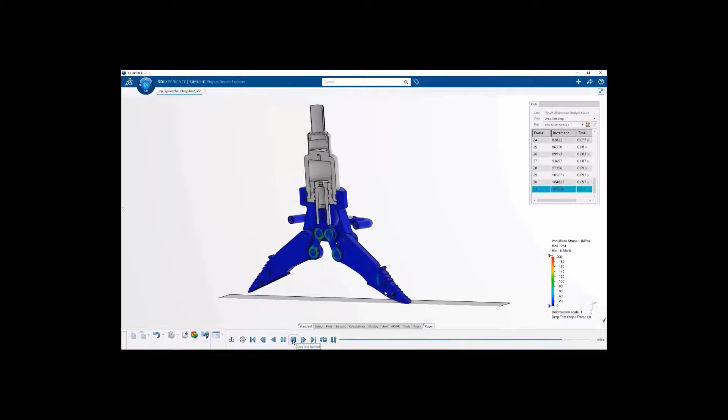Another example of an explicit virtual test would be a drop test. So we're running this on a handheld emergency rescue device and just taking a look at some results here when this object is dropped. And finally, of course, explicit results are often used for crash, and a colleague of mine at SolidWorks just put together this fun little example of running a forklift into a post, and this was done with explicit as well.

So we do have a few customer testimonies here, a couple that I wanted to share before I leave you with this. So SGA is an Italian customer, and they're able to speed up their vibration damping product development with our simulation solution. They're using Structural Performance Engineer on the cloud to validate the anti-vibration performance of the silent block, in this case on a control arm bushing.

They provided a pretty nice quote. 3DEXPERIENCE Works gives us a full range of tools that we need to ensure that our products are safe and reliable.

Another customer that we have here is Focus Energy Services, where Pete was able to work on some new bearing designs and save a lot of time and money using the cloud and our platform solution to do this. And his quote: with SOLIDWORKS, we were able to evaluate a range of geometric and material options, a process that helped us quickly optimize the tapered barrel shape design of the bearings and also decide the best high strength steel for the design.

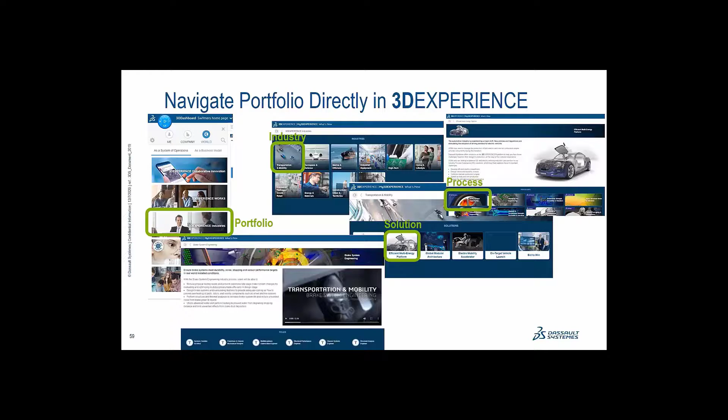After choosing the industry, you can choose the solution, where you see some information, some text, images, and videos. You click on the individual processes that are within that solution. Again, videos, images, and details of the value added. And then for each process, there's a collection of roles that contribute to that.

You choose the role, let's say structural analysis engineer, for example. And this is a list of all the apps that are included in that role. So all the value is clearly stated in this structured manner for you to navigate and find out exactly what you're getting in each release.

There's a generic, publicly accessible user community called What's New, where essentially the value added per release per FD is given for each role. So you can similarly navigate. Once you click on the link to this dashboard, you see the works portfolio, the industries portfolio. If you click on the industries one, for example, you see a collection of what's new with new roles or what's new with the enhanced roles in that particular release.

So you see here, this is showing it for FD02. Let's say you want to see the enhanced roles, you click on that, and here's all the roles that were enhanced. Then you click on the one that you want to learn more about, and you see there's the exact information that I showed you earlier in the presentation, the functional and user experience value delivered for that particular FD, including images, text, and movies.